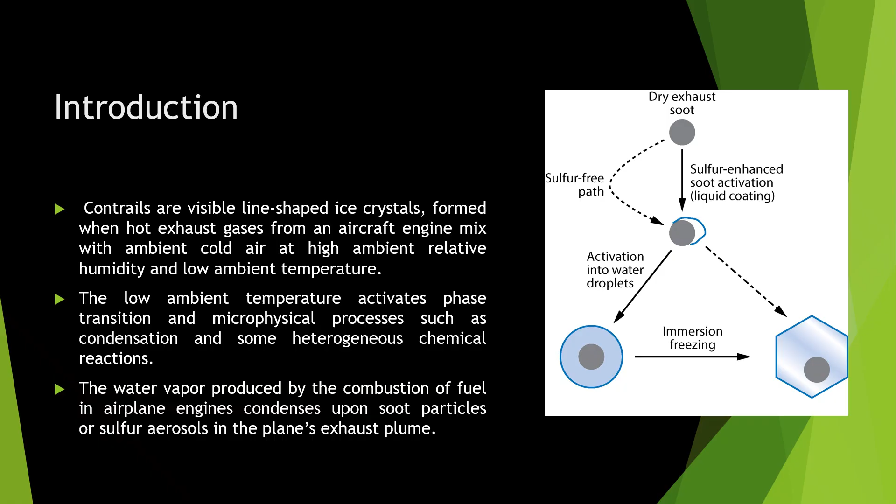Contrails will continue to grow or persist to form artificial cloud if the temperature of the ambient is below 232 Kelvin. Otherwise, it will disappear. The persistence or continuous growth of contrails will lead to artificial cloud, which increases the number of clouds in the atmosphere, absorbing heat from the sun and releasing heat in the evening, increasing global warming.

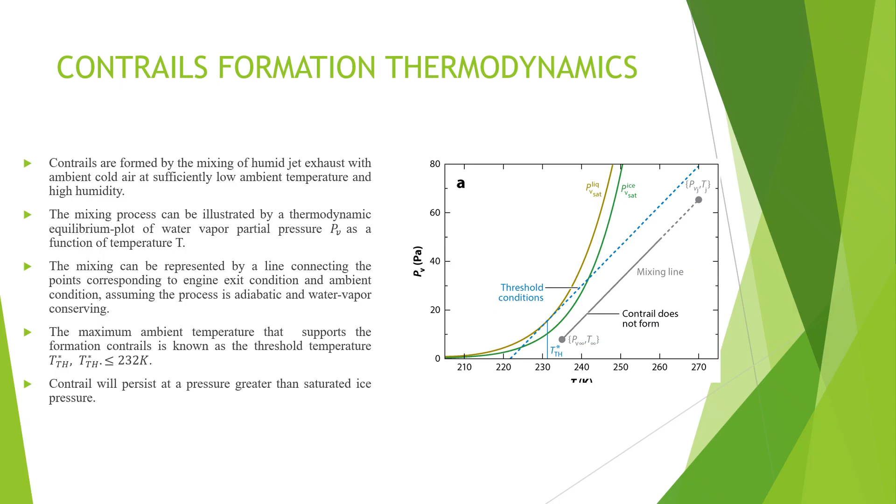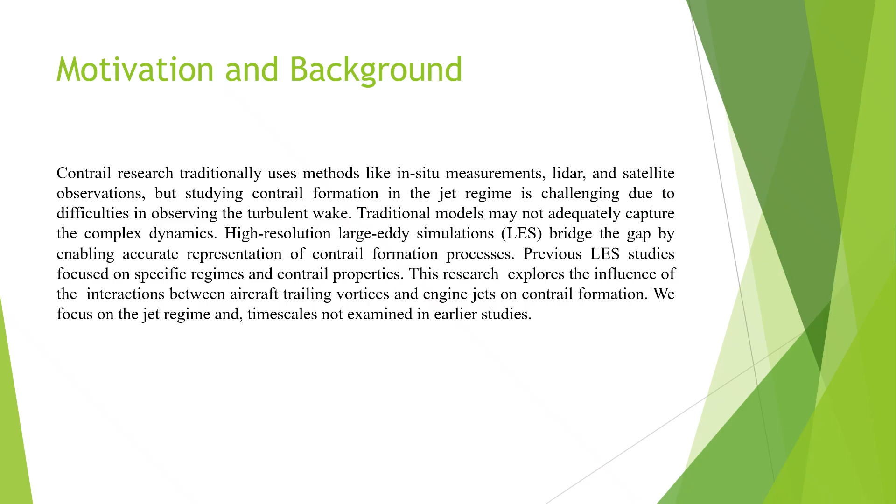So the motivation for studying contrails computationally is because contrail formation is mostly being studied experimentally using the traditional method of in-situ measurement. But because contrail is a global measurement, there are errors due to approximation. So it is better to study contrails, which are divided into regimes, the jet regime, the diffusion regime, and the dissipation regime in between, computationally. Little has been done in this area, especially at the jet regime of contrails. This is why I want to study this.

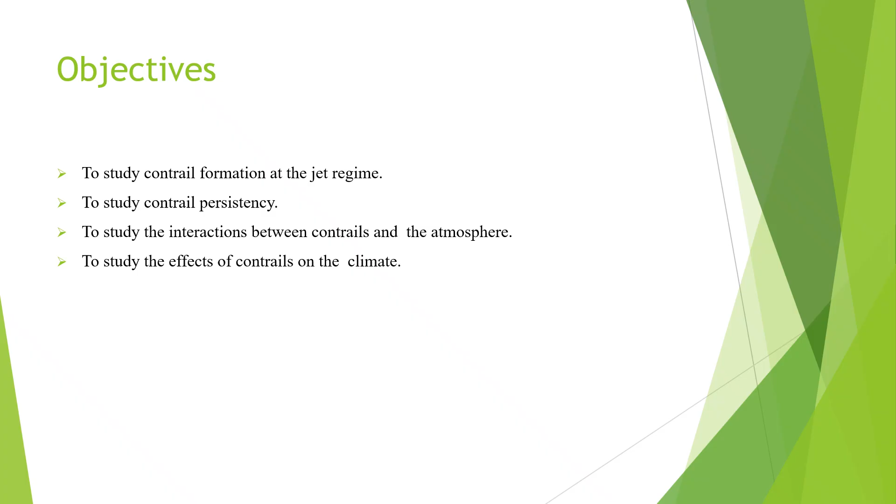And my objectives are to study contrail formation at the jet regime, the regime in which contrail is formed, and to study contrail persistence: what causes it to persist, how it persists, and apart from ambient temperature, which we know causes persistence, which other effects or quantities cause persistence of contrails. And to study the interaction of contrails and the atmosphere. Also, finally, to study the effect of contrails on climate.

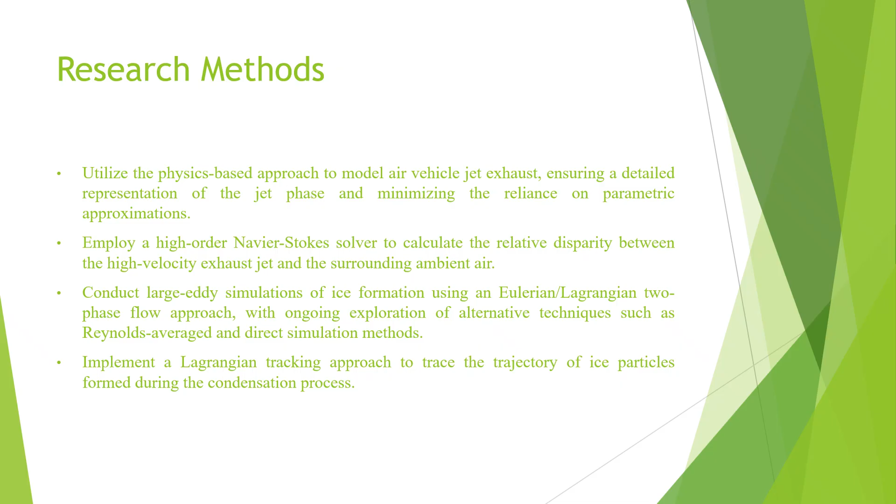So I'll use a physics-based approach to model the jet exhaust and ambient, the plume and the ambient, then applying LES methods to solve the Navier-Stokes equations, and using Lagrangian particle tracking to track ice particles. Unfortunately, I won't be presenting my results here because my results are submitted for publication. They are all under publication.

So next, I move to the study of detonation by doing a comparative analysis of induction zone dynamics across multiple fuels in rotating detonation engines. So for everyone to understand rotating detonation engines better, I shall explain flames and combustion. Flame is the chemical zone of combustion. So we have two types of flames: the premixed flame and the diffusion flame. There are many flames in between, but primarily we have premixed flames and diffusion flames.

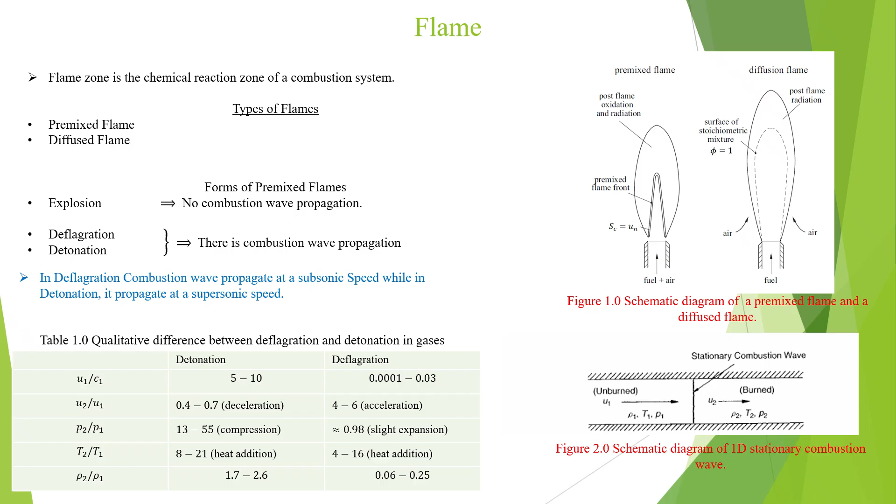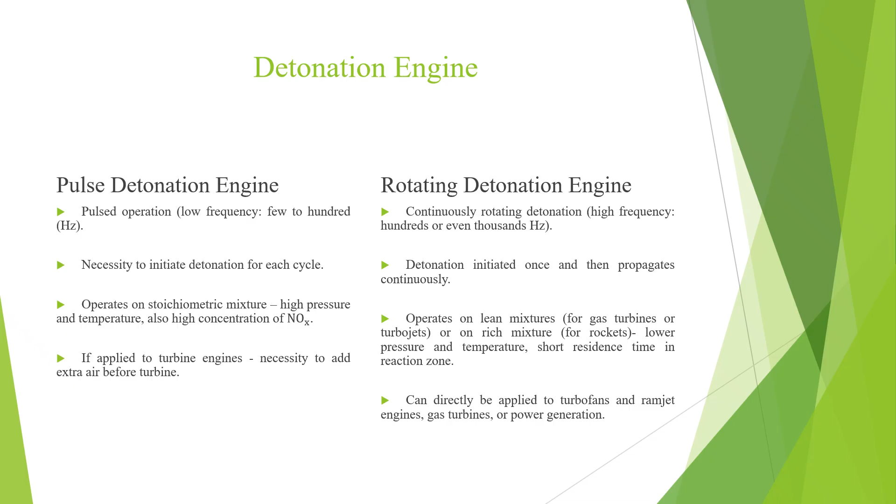So in detonation engines, we have two types: the pulse detonation engine and the rotating detonation engine. As the name pulse implies it's stationary, while rotating implies it's rotating. So rotating detonation engines have a rotating combustion chamber. The combustion chamber is like an annular ring where air and fuel are injected from the bottom. Air comes from the upstream, fuel is injected, goes straight to the downstream, and the detonation wave occurs. The detonation wave is the wave which moves supersonically, above Mach 1.

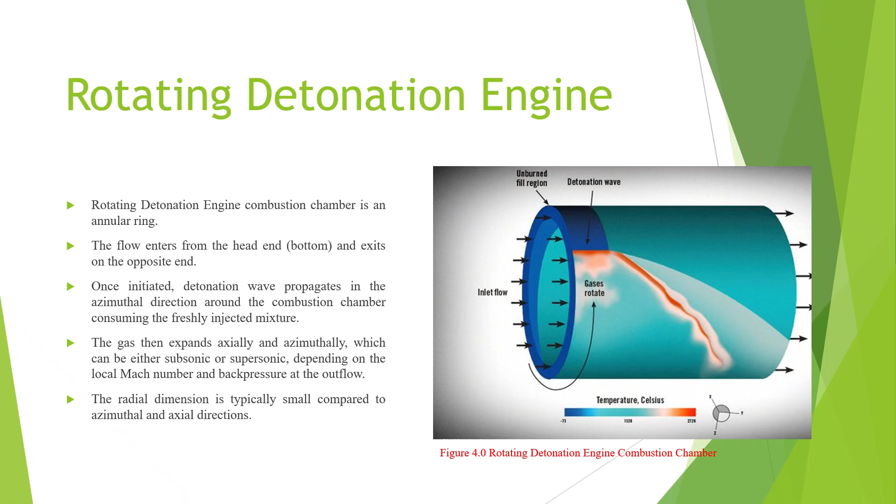So of course, rotating detonation engines offer high power efficiency and hypersonic propulsion. Hypersonic in essence in terms of from 0.8 to 5 and above Mach number. Oh, I have to pause on that.

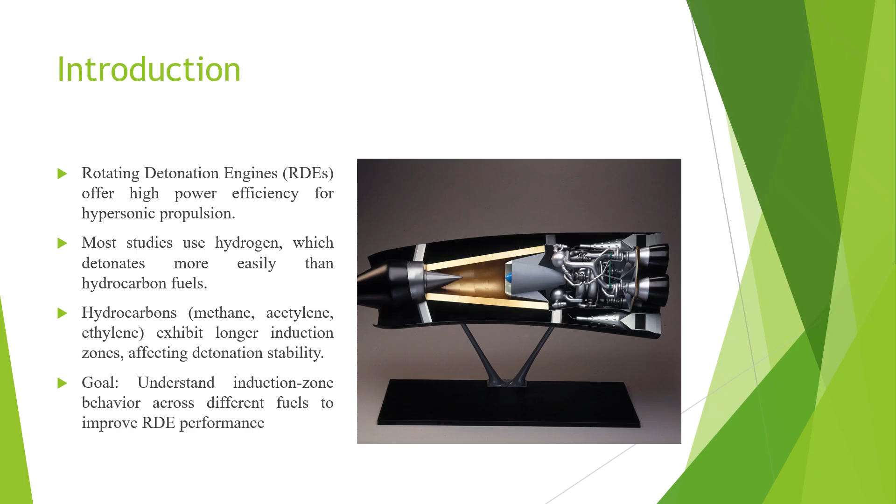While most of the studies on detonation waves use hydrogen as fuel, my goal is to use some heavy hydrocarbon, some light hydrocarbon fuels such as methane, ethylene, and some JP fuels like kerosene. Likewise, some eco-friendly fuel like ammonia. To understand the induction zone behavior across the different fuels of the rotating detonation engine performances.

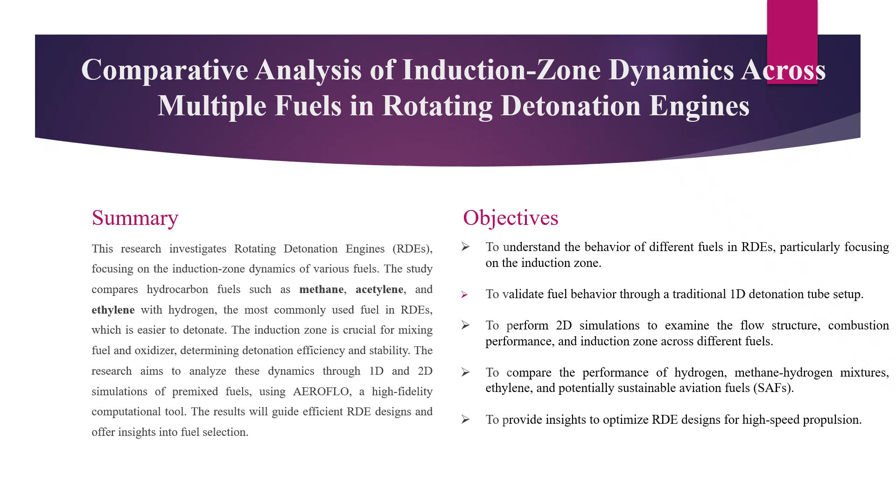So these are my objectives: to understand the behavior of rotating, in particular focusing on the induction zone, to validate fuel behavior comparing for traditional detonation tube setup, and to perform a 2D simulation. Also compare my result of 1D of hydrogen to methane, or other mixtures such as ethylene, in the future JPs and ammonia.

So for the simulation setup, a 1D detonation engine, actually an open-ended chamber of 10 centimeters in length, and about 0.1 centimeter was used as the hotspot zone for ignition of the mixture, and no slip boundary condition was used. We used MUSCL and WENO for the spatial scheme and Beam-Warming for the temporal scheme. So we use different kinds of mechanisms, 2-step 4 species, all the way to 19-step 12 species.

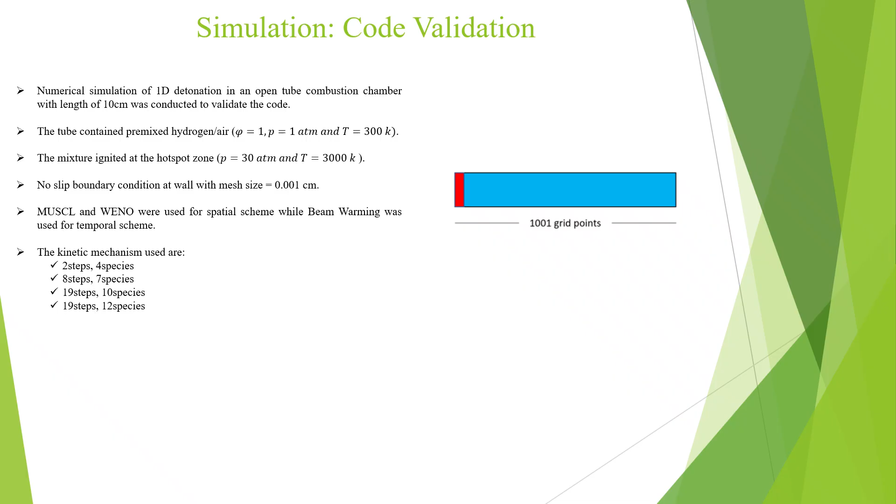So this was done for methane and hydrogen fuel, and we compare our results for methane using the pressure distribution from the upstream to the downstream for both methane and hydrogen. You can see the hydrogen combusts faster, about 1 centimeter to the downstream, while methane combusts slower, very slow to combust.

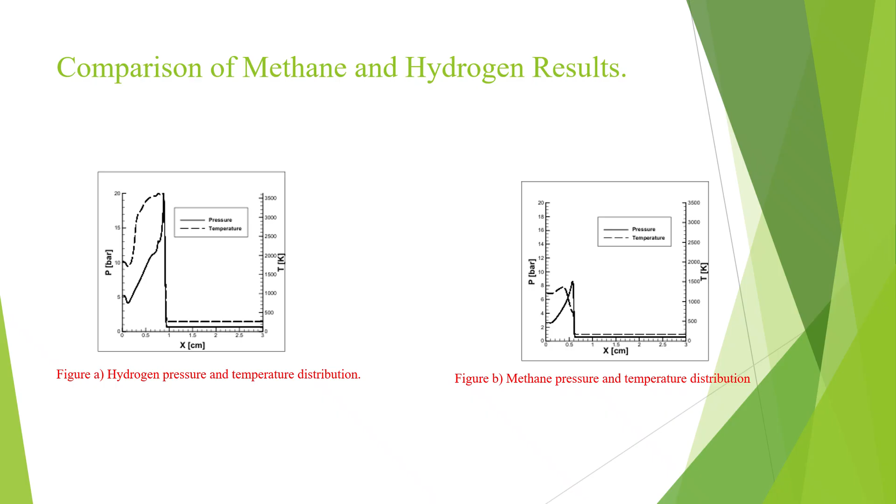So in principle, people often mix methane with other fuels to achieve combustion, but in this case, I use pure methane. So I'm also presenting results comparing the temperature and pressure for both methane and hydrogen. The same. We see hydrogen shows a good result as expected, while pure methane shows a not good enough result. So we see this species moving from the upstream to the downstream, the combustion actually takes place faster in hydrogen compared to pure methane.

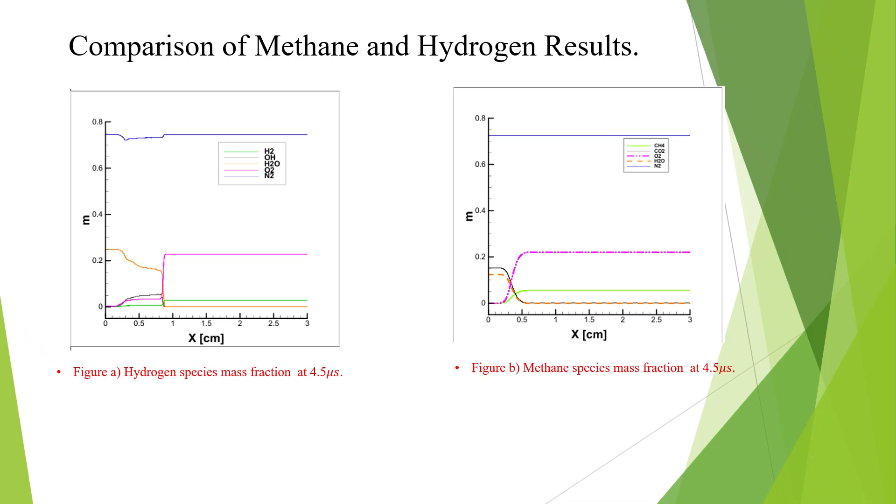So then I'm working on a sandwich panel triply periodic minimal surfaces heat exchanger. The goal is to take heat from the aircraft to control the aircraft cooling system, and the principle is taking heat from an aircraft engine can make it fly supersonically, removing excess heat. So triply periodic surfaces give us a large surface area to volume ratio that can help us dissipate heat.

So triply periodic minimal surfaces are mathematically defined continuous and periodic structures with minimal surfaces and no self-intersection. They are widely used in engineering and material science for creating lightweight, high strength, and high surface area structures, which makes them applicable in the case of heat exchangers because we need high surface area to increase the transfer rate or to dissipate it faster.

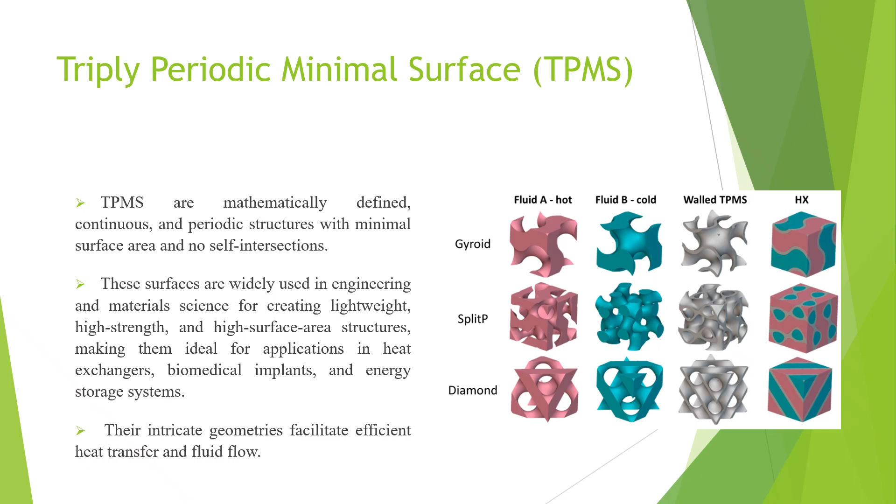So this is a sandwich panel heat exchanger, to have the layers: the upper skin layer, the core, and the lower skin layer with some binder. So the core will be a TPMS structure. It can be gyroid or many types of TPMS, gyroid, diamond, and so many. But gyroid has been proven to have more efficiency in many cases of application.

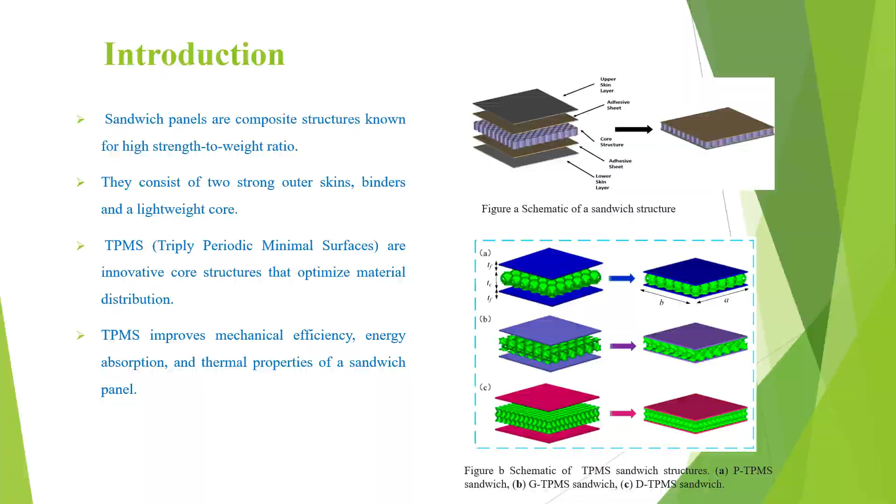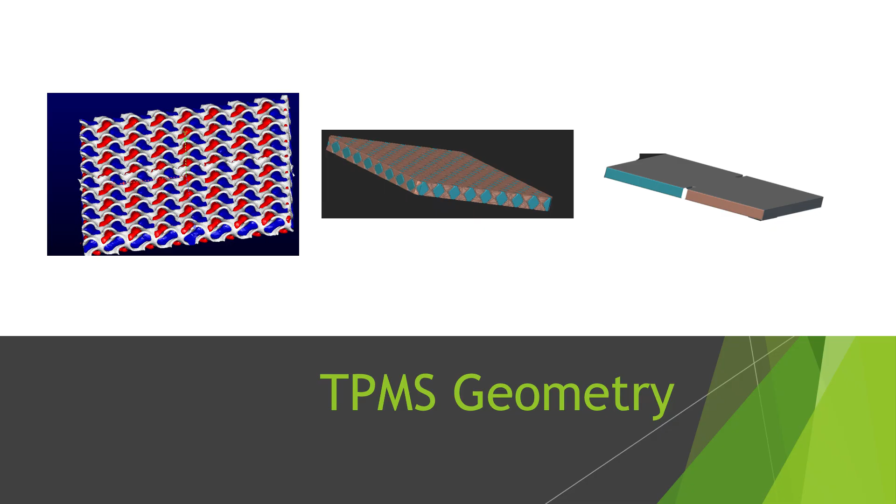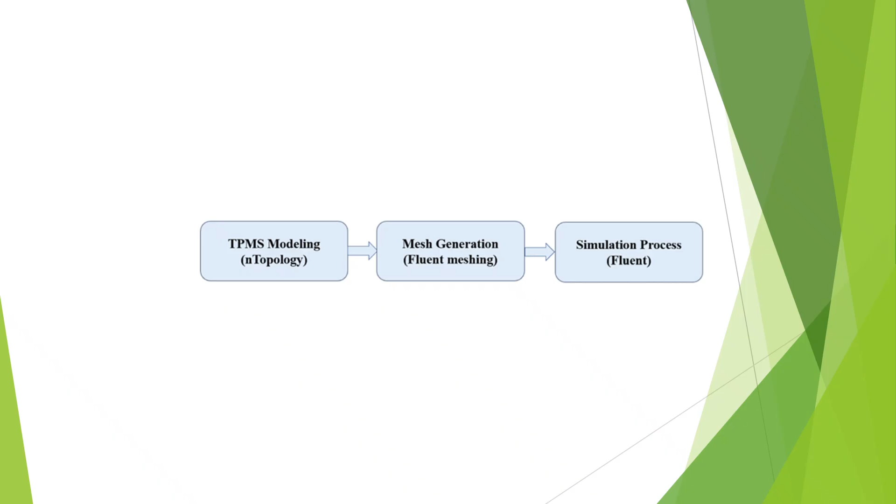So in this case, I developed the core of the TPMS sandwich panel using nTopology, meshed with Fluent meshing. Then for running simulation on it, I have to create a unit cell out of my TPMS structure. So the process is modeling with nTopology, generating the mesh with Fluent meshing, and simulating it with Ansys Fluent. I take a unit cell out from the TPMS structure, then I simulate it, and these are my results.

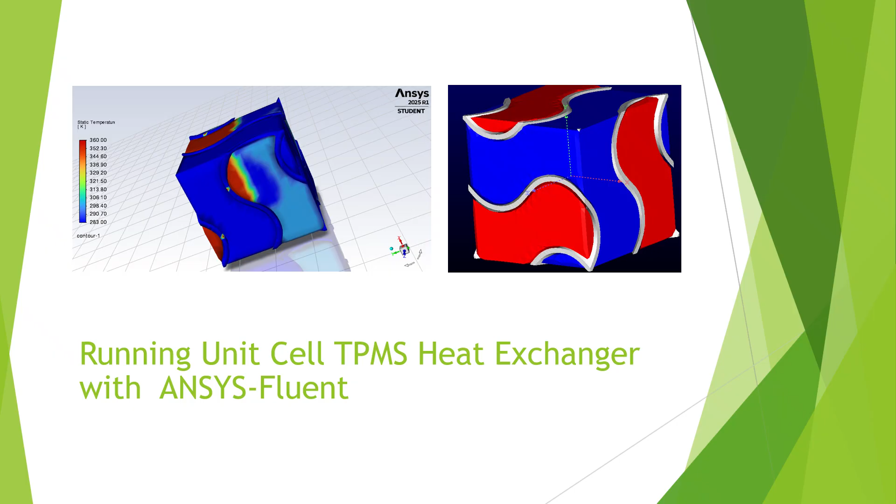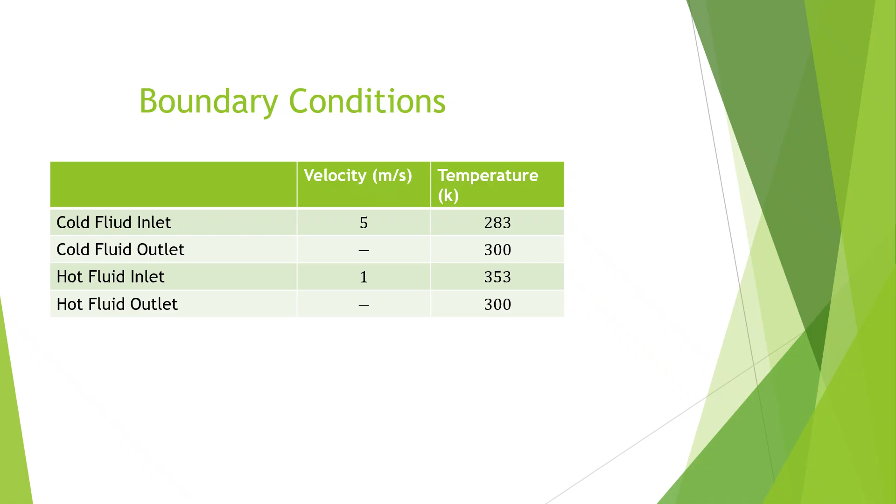So these are the boundary conditions for the cold fluid inlet and hot fluid inlet. Velocity is 5 meters per second and 1 meter per second respectively. And the temperature is 283 Kelvin and 353 Kelvin respectively. So at the outlet, I achieved the same temperature of 300 Kelvin for both cold and hot fluids. So these are my temperature contour plot results.

In summary, I was able to develop a physics-based high-fidelity simulation to model aircraft exhaust plumes to study the formation of contrails at the jet regime and the persistence of contrails. Likewise, in the rotating detonation engine, a 1D induction zone of the rotating detonation engine for hydrogen fuel and methane fuel has been studied.

We're currently working on ethane and JP10 fuels. And likewise, I'm currently working on a sandwich panel TPMS heat exchanger, to make the base of an aircraft a heat exchanger, removing heat from the engine and cooling the fuselage so that the aircraft could fly supersonically.